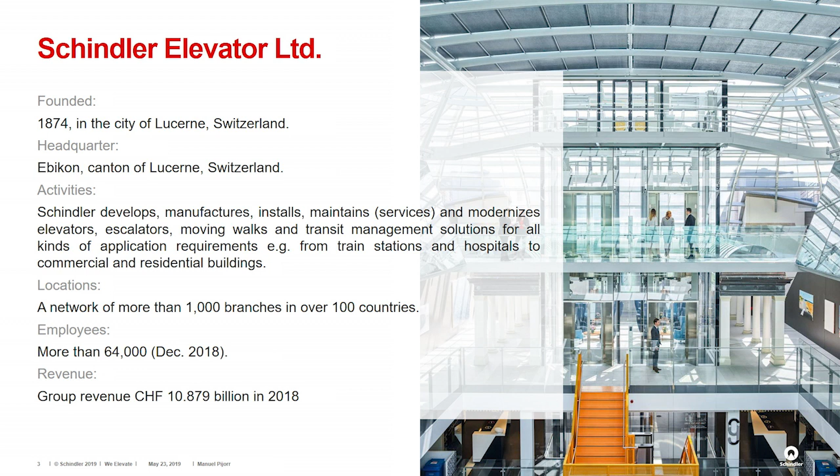So goals and challenges of digital transformation, especially in our industry, or maybe just in our company, but I think also in our industry, physical testing is very, very present. That's a bit related to us being originally a mechanical company. Software is becoming also very, very important. We have a late integration of mechanical, electrical, software stuff and so on.

So therefore we invest a lot of time and money in integration tests late in the process. Just in 2016, we spent around 3,200 hours just for software testing, just for the release tests for our software. And overall, I think per year we are spending around 2.3 million Swiss francs for physical testing in our real installations and test towers. And we want to get rid of a bit of this, not all of it, but just a bit.

The other thing is that we have a high complexity regarding variance in our system. Just having a high level look at different system architectures we're having, it comes out that there are 20,000 different system variants, and every one of these variants contains different component variants again. So we end up with a variety of the product which is huge and simply exploding, and we are simply not able to test every one of the possible variants.

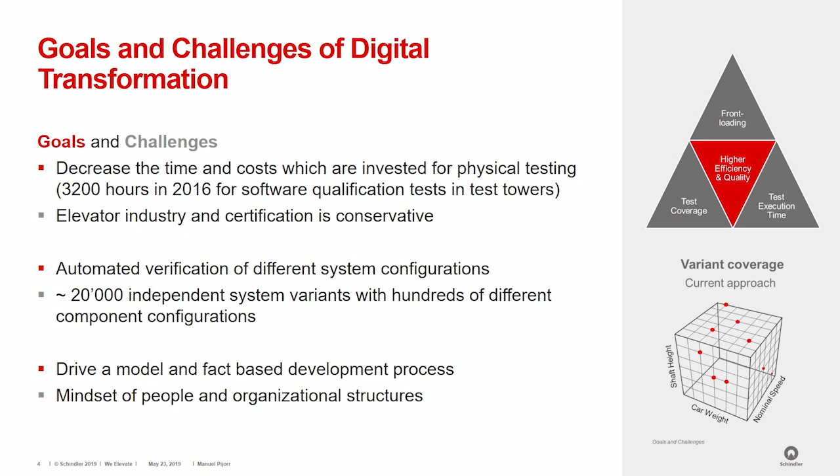So EDEn, how we try to tackle all these things. We have this nice project, or today it's more a product. It's called EDEn, the Elevator Dynamics Environment. And it was started as a pilot project, focusing mainly on the mechanical, physical behavior of the elevator system.

As I mentioned, we have a huge variety also regarding mechanical stuff inside the elevator. And therefore, this was the main focus in the beginning. But very, very fast, it turns out that you cannot make use of this mechanical model without any software model, without any electrical model, because you just have to run these things.

And in the end, now today we have more or less a digital twin on the mathematical side of our elevator system. And today it is a whole modeling and simulation framework covering processes, covering different applications for system-centric validation, system-centric analysis, for a holistic development process for our elevator products.

The product itself or the project itself is globally established, so we're working together with colleagues from North America, from China. The development is taking place in India and in Switzerland, which is really cool. Maybe a bit regarding the timeline. So we started this project roughly 2 years ago in July 2017. Today there are more or less 4.5 people working on this.

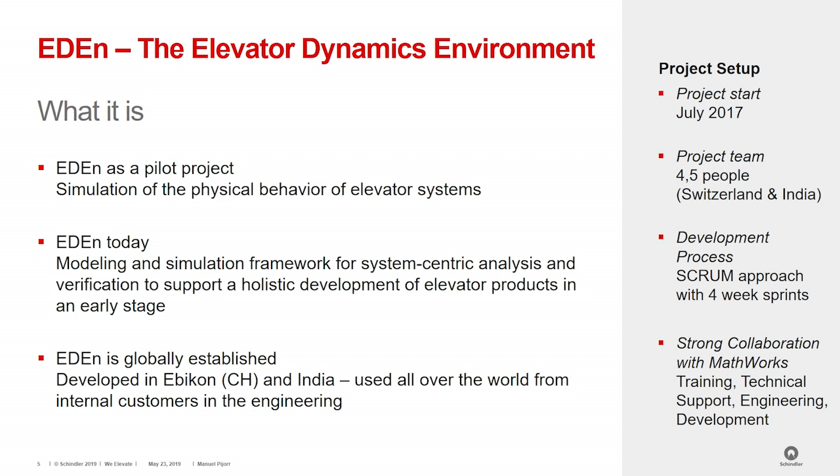It's an agile project. I think that's the only way you can manage this, because it was more bottom-up driven than top-down. So the requirements for all these things were not that clear, and day by day there are more customers requesting new features in the model and so on. So this is the only way to handle this. And also, of course, we had a huge benefit from the collaboration with MathWorks regarding training, also consulting, their technical support, and so on.

I brought 2 models with me. So on the left side, that's an elevator. And here on the right side, that's also an elevator. So as usual, there are 2 models, so both of them are wrong. So the question is a bit what kind of question you want to answer with which model. So you see here the graphical representation of this. Most of you will maybe recognize this part. It's the landing door in the upper floor and the inside of the cabin. And I just want to give you a quick introduction on what an elevator looks like.

So we have the mechanical part of the elevator, what you mostly know, as I mentioned, the cabin, counterweight, the whole roping system. Then we have the so-called traction sheave. This is to transfer the power of the motor via friction into the mechanical system to make the whole thing move. We have the whole power electronics part with the motor, the machine brake, the safety system, sensoring system, the whole software part, the user interface, so the buttons you're pressing, and the power supply. So in the end, we covered everything of our elevator in this model.

And here are some little interesting facts maybe. So there are around 11,000 blocks now in this model. It's a generic system model, so all of these 20,000 different variants are covered within 60 architectures in this one model, which is parameterizable with roughly 350 parameters. And due to the fact that we are using Simscape for the modeling of the mechanical and electrical parts, we are covering today more than 1,500 physical signals inside this model.

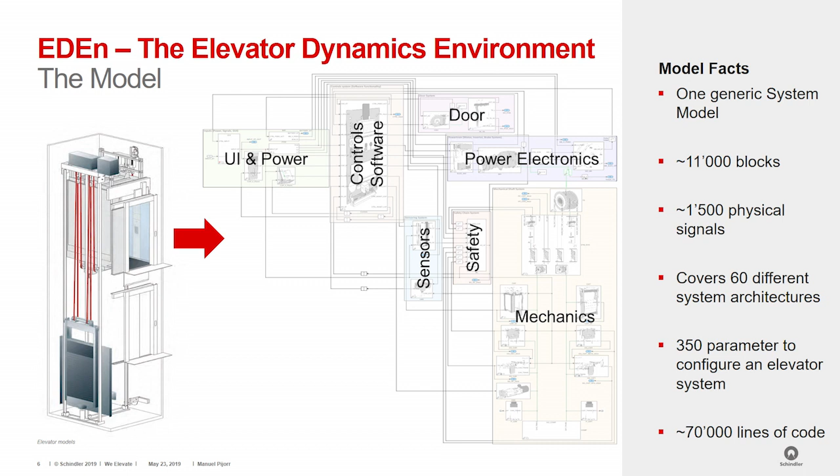So then I'll quickly tell something about how this is all working regarding the development process with MATLAB and Simulink. So we have our development environment. We are talking also about deployment, even if Matthias said that deployment is not his favorite wording for this. So it's more the application of what we're doing, and then how the project management is connected. So you see here, we're using the whole MATLAB project stuff for the data management. There's a huge layer of automation, scripting, data dictionaries, GUIs with the App Designer. Also the documentation is done inside the models and transferred automatically to HTML files, which are automatically hosted in our own documentation system. So there's a huge process automation chain behind this also.

The modeling, as I mentioned, is taking place in Simulink and Simscape. And then what else? What is also really, really important is the part of model-in-the-loop testing. So verification of our models. Because, as I mentioned, 11,000 blocks, whenever you change something, it is not predictable whether you also changed something else you don't want to have. So therefore, this is really, really important. We're covering this today with Simulink Test.

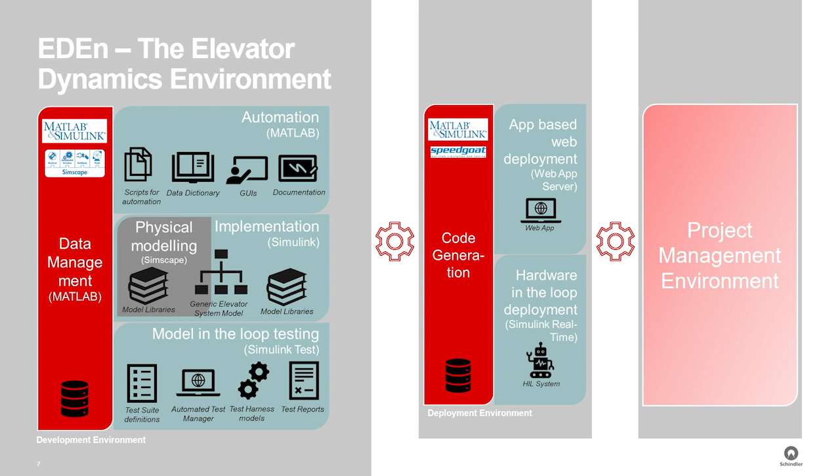The deployment environment here, it's about code generation again, and then how to bring it to the customer. So there are two things I will talk about. It's the app-based web deployment with the MATLAB web apps, and it is about hardware-in-the-loop deployment. So hardware in the loop, quickly, for those who do not know what this is, it's in the end the method to test the system under test and to connect it to a model to extend the context of where the system under test can be tested. In our case, we are just bringing the mechanical system as a model to our software controller and test it together with the mechanical system, even if the mechanical system is not there. So we're just faking it with the model.

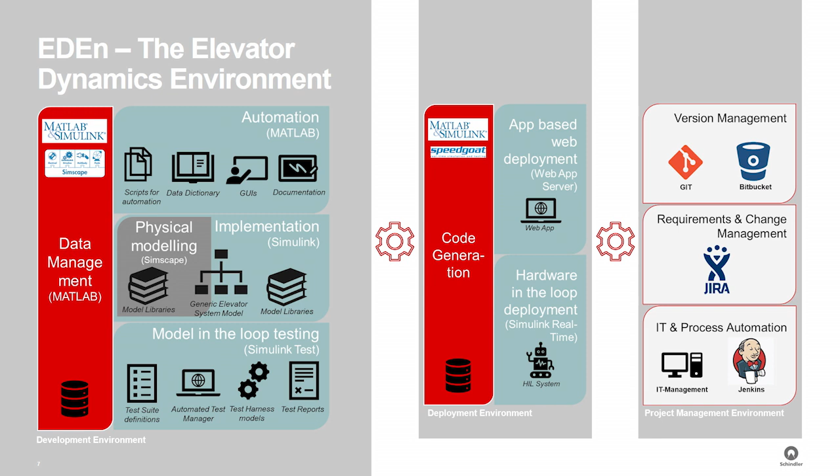For the project management environment, just to have it complete, as we are working agile, we are using Jira, Bitbucket, Git, Jenkins for the process and automation. Everything is really integrated in one big process using REST API via MATLAB for communication and so on. So it's really well implemented.

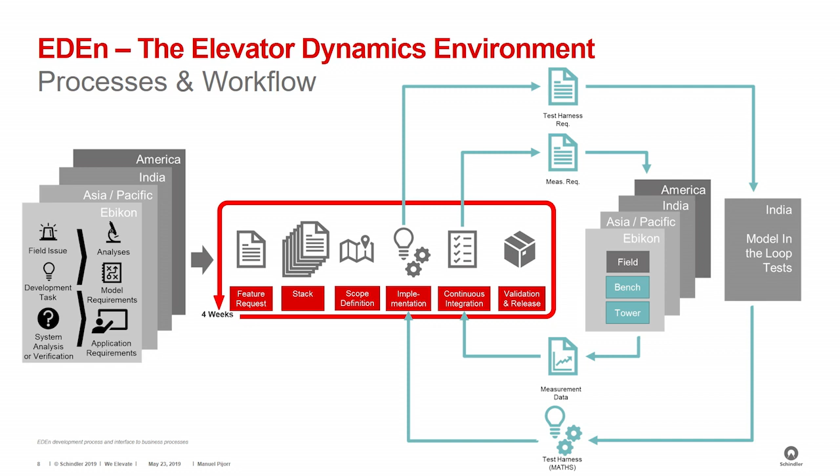With the process automation, after the implementation, we're triggering directly the model verification. So the model in the loop tests, what is done in India. We also have the possibility to directly ask for measurement data. So giving measurement requests to the different sites using their installations there to analyze and validate what we implemented.

So one of our applications, the Garden of EDEn. It sounds a bit pathetic, but in the end, it's our own web app server. It's a bit like if you're going in your iPhone to the App Store, you will find a bunch of applications there. And here it is the same, not that much. So today we are covering 8 applications, but it's still okay.

And the goal was really to enable the people who are not that familiar with Simulink, MATLAB, to use what we have done. And even if you are familiar with MATLAB Simulink, it will cost you a huge amount of time to go through it and to understand what happens with all these 11,000 blocks. So therefore we said, okay, maybe we must change this and enable the people in a different way. And therefore the MATLAB web apps was really perfect.

So we built graphical user interfaces to spot on really specific points in the model, because every application in the end is connected to the same model. So it is this one model we showed you, but the graphical user interface is just pointing on one specific application. So for example, there is a specific test case called pulsed evacuation brake opening.

So it's a safety feature if you're stuck in the elevator. And just to get there to activate it in the model, it takes a bit of... so you have to activate some states inside the elevator, and just to come over this, we prepared a specific graphical user interface for this to spot on this specific part.

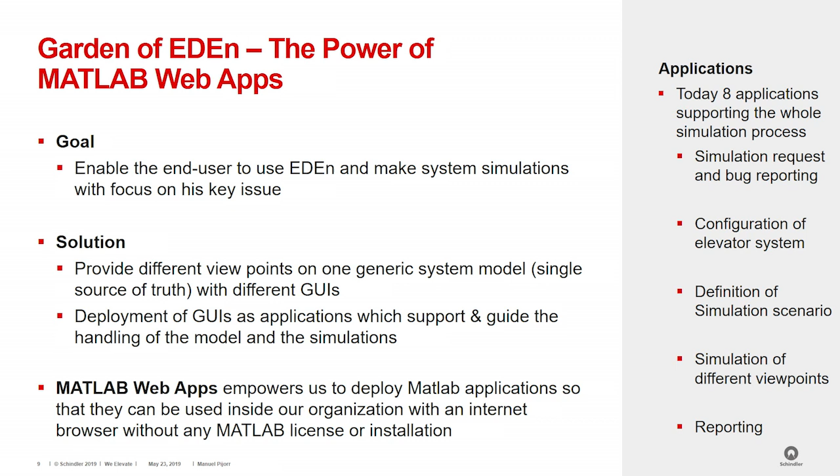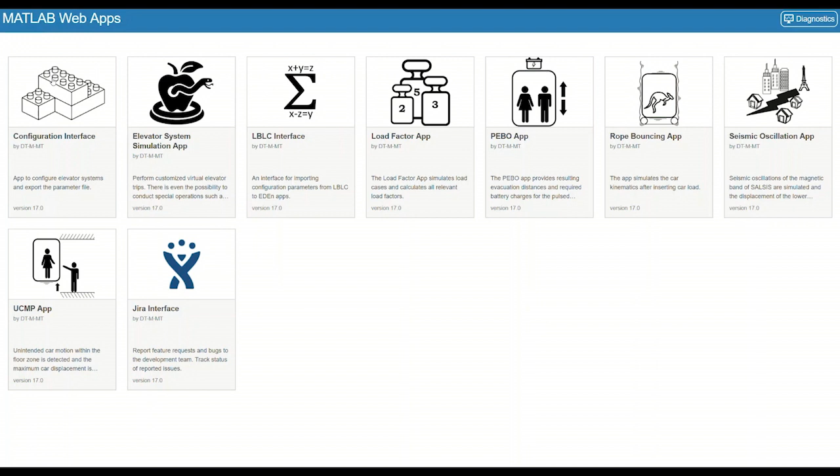And the web apps, it's really cool. So you do not need any license for the users, so they can just enter it via the internet, via any internet browser. And this is working really cool. So I now try to show you a little video. So this is our web apps. You see the configuration interface here. I talked about 350 parameters. So this is guiding the user to have an idea what kind of data he has to input.

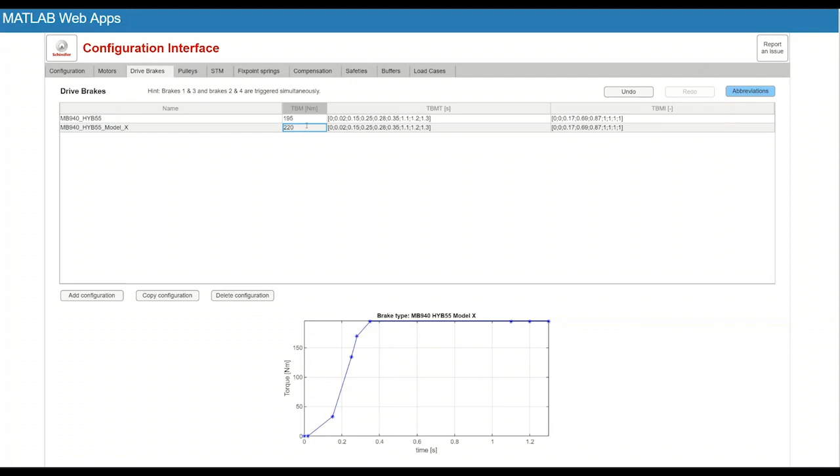Here we are changing the machine brake of the elevator machine. You can create a bunch of different configurations. In the end, you gather a real configuration set. This has roughly no limit. Normally, inside one application range, we are covering 60, 70, 80 different configurations. And with this, you can configure all the things.

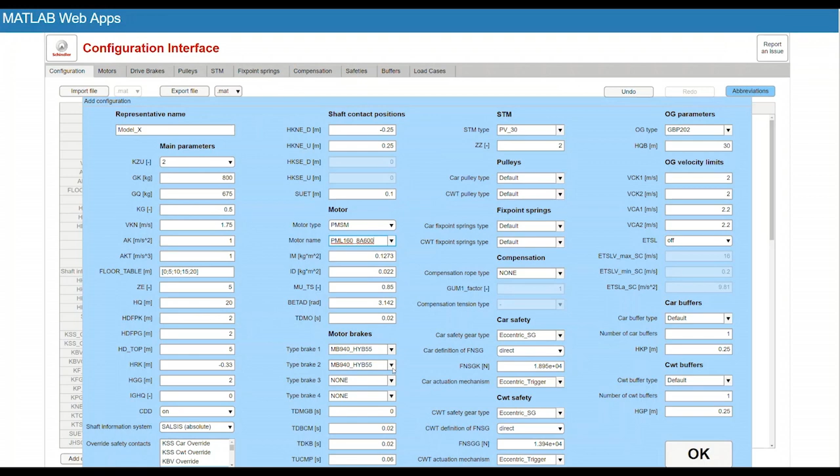This is also linked to local parameter databases. So for example, you saw that there's a huge list of machines. So we have roughly 1,000 different variants of machine types, and all the parameters are directly linked there in a database. You can export it then, so it's exported as a MAT file. You can also export it as an Excel file, download it, have it locally on your PC.

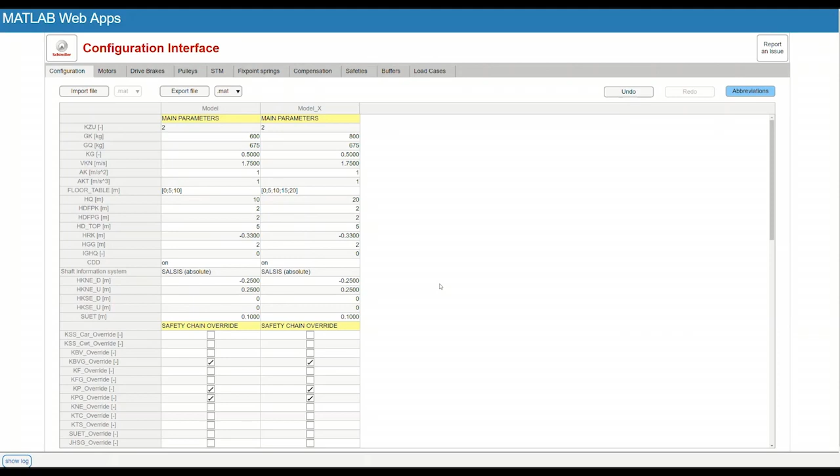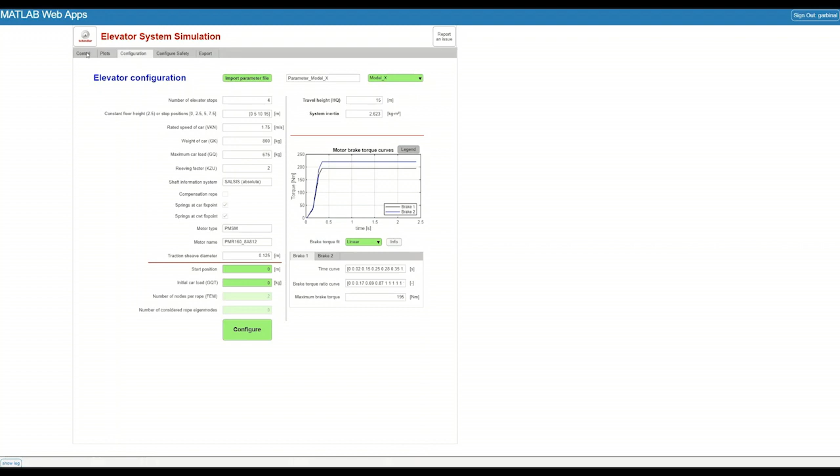Then you go into the elevator system simulation app. This is a more generic app to just handle the elevator. Import the configuration file. So now if you have a look at the brake there, 195. So now we see it here. So the second brake was changed. So the graph changed a bit.

So now this was loaded, and now we can simulate the elevator. So there's a little graphical representation, not that nice, but it is working just to see what happens. So you can now do all this stuff what an elevator is normally doing. So going up and down, what happens if you have a power failure in the power system? What happens if you have a rope cut, for example? So what usually does not happen.

But just in case, we are prepared also for this, right? So if you're a big fan of Hollywood movies, there it happens sometimes, but not in the real world. And now the user can just prepare and can just do his trip.

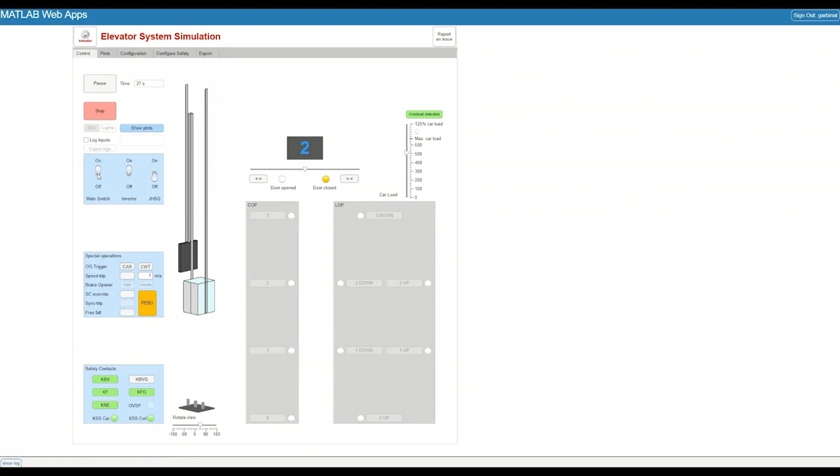There's also a log file mode, so everything is logged in the background. So every interaction with the graphic user interface, to replicate these simulations with different variants and configurations to see whether the behavior changed and so on. So for example, now there's an emergency stop because of a power failure.

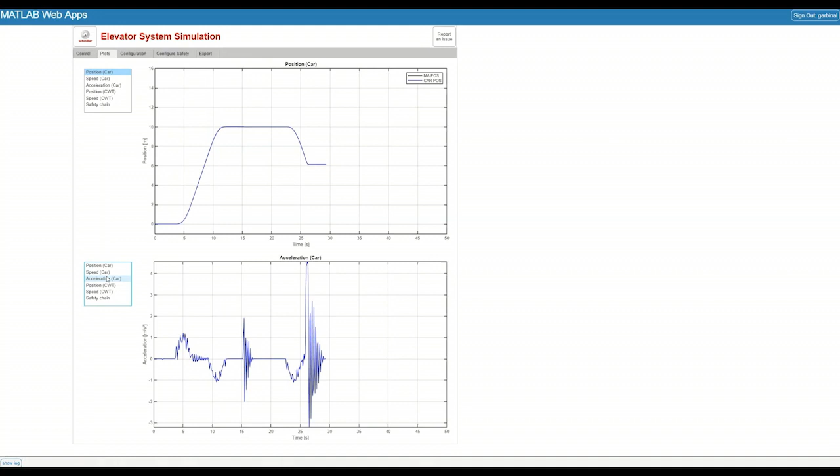Via the plots, we can see the physical signals, position, speed, acceleration. Here, just as an example, just a bunch of this stuff. This can be exported, further analyzed inside MATLAB, inside Excel, whatever choice you have for the tool. And yeah, that's it for this. So just for a rough introduction to this.

So the only thing you're really doing is clicking the start button, and then the simulations are done for all the different test cases, and the analysis is automatically done, and you just export your results, and then it's done. And this is all done outside MATLAB, just in your internet browser.

Okay, the other thing, hardware in the loop. And now it comes really from physical testing to a model-based approach. Now maybe it becomes a bit confusing. I try my best to not create a big mess. So this is the system under test. It's our elevator controller. It is more the application layer of the elevator software. It is not this control software everyone knows for controlling motors and so on. It is more the application layer, really.

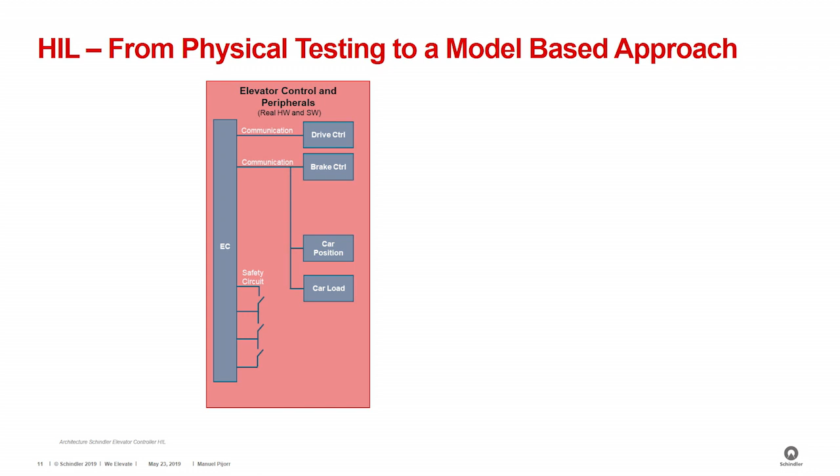So you have our real elevator controller, the EC, with the real PCBA, with the real software, the real processor, CPU and so on. Then also the drive control, so the control of the machine is real. You have the real brake control, the sensoring system for the car position, for the car load is real, and also the safety circuit, so the safety device, so to say.

And then it is looking like this on the left side, so it is roughly this big, weight, I don't know, 300 kilograms, something like this. It's our normal training simulator. This is already in place. And this is how the people were testing the stuff for years. The problem here is there's no elevator. So it's just a controller, but no elevator. This means you have no load, no friction effects, no bouncing effects of the ropes, simply no system behavior. And this leads, of course, to a big lack of things you could test with this stuff.

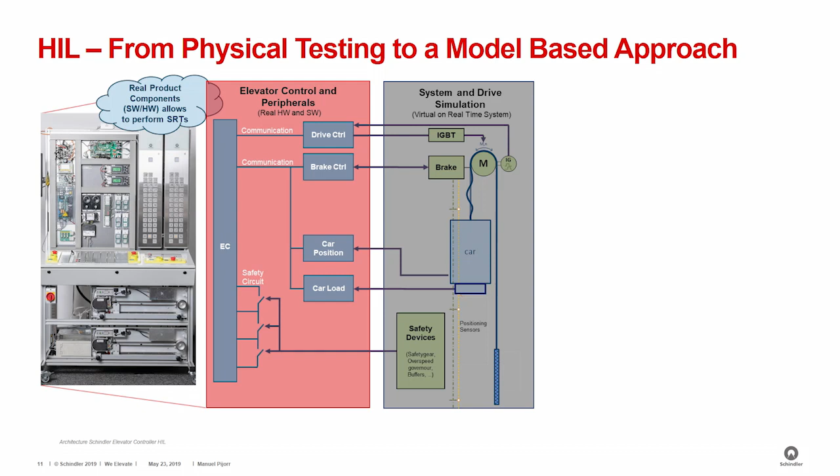So therefore, we optimized the model we already created to run it in real time. So you have all the mechanical stuff I already told you. I marked it here in our model. The gray parts are model, the red parts are real.

And in the end, then we had a so-called tower in the box. You see it here in the corner, in this little Speedgoat real-time box. So just imagine, this controller stuff is really that big, and the whole mechanical shaft model is that big. So it's quite interesting. It is a bit different than in reality.

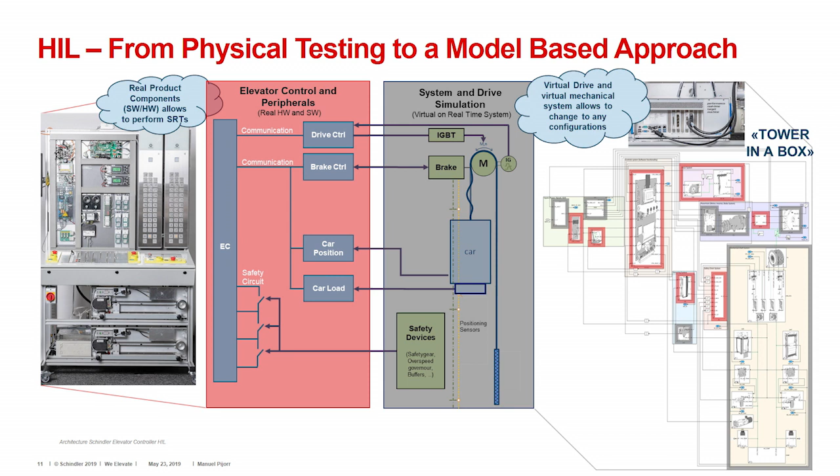And with this tower in the box, we are now able to perform every test like we are doing it in our real shaft. But before the mechanical stuff is ready, and also without occupying these test shafts, because this is costly and takes a lot of time, also the installation and so on.

Here's a little example from the project. So the infrastructure we need for a so-called SRT, the software release test. Today we can just use one HIL test bench. Before, we needed a complete test tower installation, two people testing and so on.

And now we are focusing on a specific test. It's the so-called safety gear test. The safety gear is exactly what I mentioned. So if someone is cutting the ropes, for whatever reason, the safety gear is the last instance of the safety system and is mechanically braking the cabin when it's falling down.

Now we can do this within 90 seconds, without any issues, without any safety issues. We can also test what happens if the safety gear is not activating, for example. These are things we never could do before, because you can imagine if an elevator is just falling without braking, you have a huge disaster.

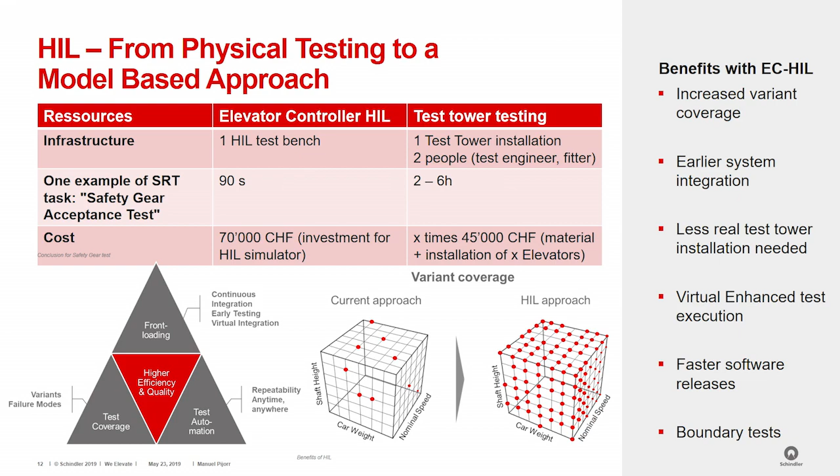And we did this now with best practice projects. There are sometimes people who are a bit ahead of others, who have trust in these things and who say, okay, let's make it happen. Let's try it out. I have a project, could you support us? And there it is really, really well accepted. But that's the only way it can go in our organization.

Then, as I mentioned, the reduction of the time for the physical testing. We have the software release test in one night now. Before it was 4 weeks, 2 people in the shaft. And the other thing is the fact-based development. As I mentioned, we already successfully supported people within several projects in different development stages, which is also really interesting, because in the beginning we were just thinking of HIL late verification, meaning at a later stage in the process.